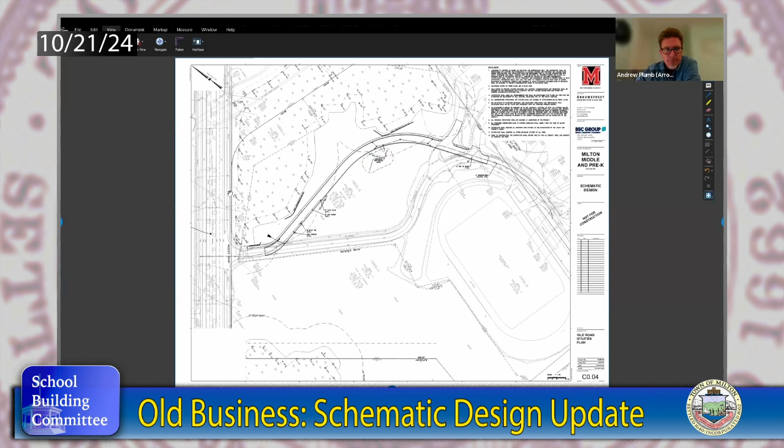Utilities plan. Let's keep going.

Okay, so here's a site plan, which we'll see again in the landscape plans and in the architectural. One thing I'll point out, which we talked about in the last meeting, is that we're basically using the east edge of the building, using that foundation as the retaining wall, whereas in earlier iterations there was the building and then a space and then another retaining wall. We found that this is a much more straightforward and efficient way to handle the grading that needs to happen adjacent to the field.

Let's go to the next one. I'm trying to get to the landscape plan, which should be any second now. Yes, this one here. Could you zoom in a little bit, Seamus, just so we can see it better. That's great.

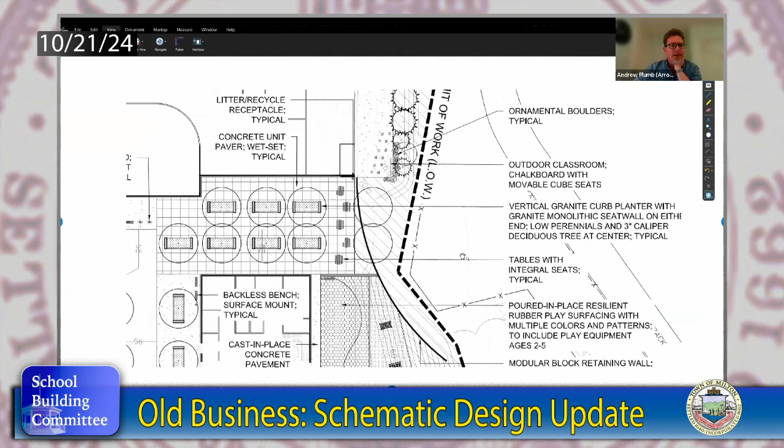Previously, we had a receiving sort of trash and receiving zone located here in the building, which we all agreed was problematic because it would mean that there was this desirable plaza for spill out space, and then the occasional need for trucks to come in and make deliveries or pick up trash. So what we've done is taken this piece of program and moved it to the end of the building.

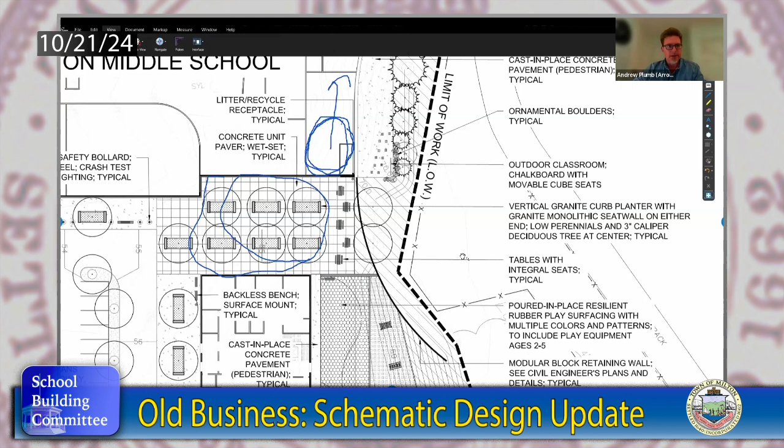That's off of Gile Road, and we're looking at putting receiving and a loading area up there. If you zoom out, I'll point out where that is, and then when we get into the architectural drawings I can call it out more clearly. Previously I was circling that spot, and what we've done is move that to this spot. So the idea is that loading and receiving can happen coming off of Gile Road into this area, which clears out the space between pre-K and the middle school, allowing it to be student focused instead of dealing with deliveries.

Shonali, did I miss anything on this landscape plan? Anything else you want to add? Just one thing I wanted to touch on with landscape is that between our civil engineer, our landscape architect, and ourselves, Gile Road is not flat. So they worked really hard to grade the new Gile Road so that as you come in, you can enter at the 55 first floor grade level, making all of that really accessible.

The north side of Gile Road is a little bit higher than that 55, which helps us with that pathway occurring on the second floor and ending up closer to the high school. So we're taking advantage of all of these slopes, but still able to maintain accessible routes without steep slopes, so that those who have mobility issues or concerns about traversing the site are still able to do so easily.

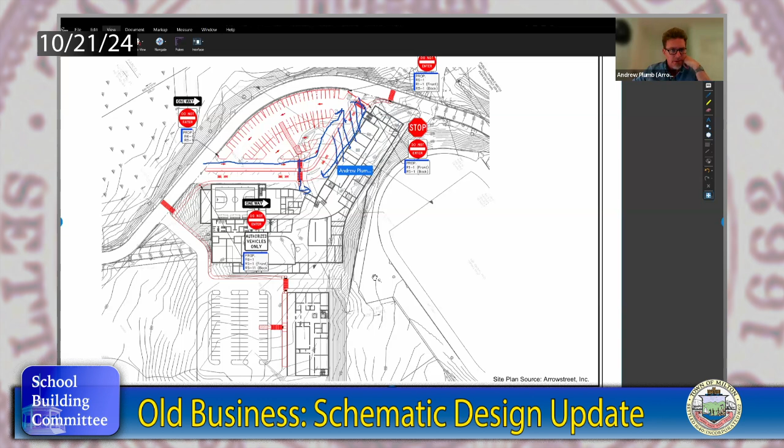The point Shonali was just making about the efforts we went through to make as flat a grade as possible is that this zone I'm going to hatch here is all very, very flat. That has to do with the coordination we were able to do across the consultants to make that work out, creating a nice safe and flat zone to arrive to.

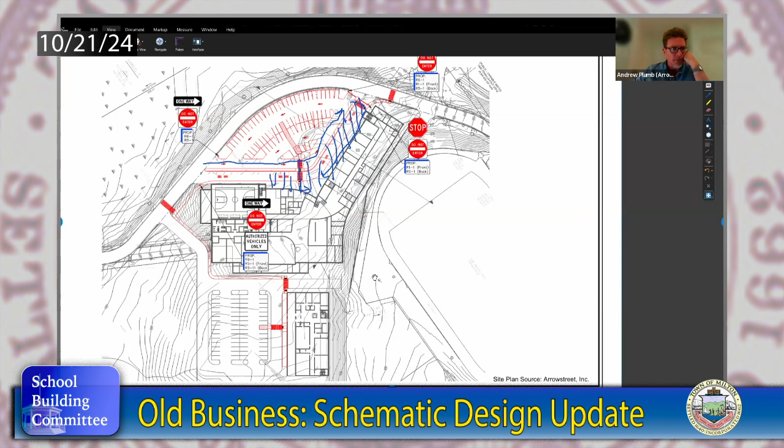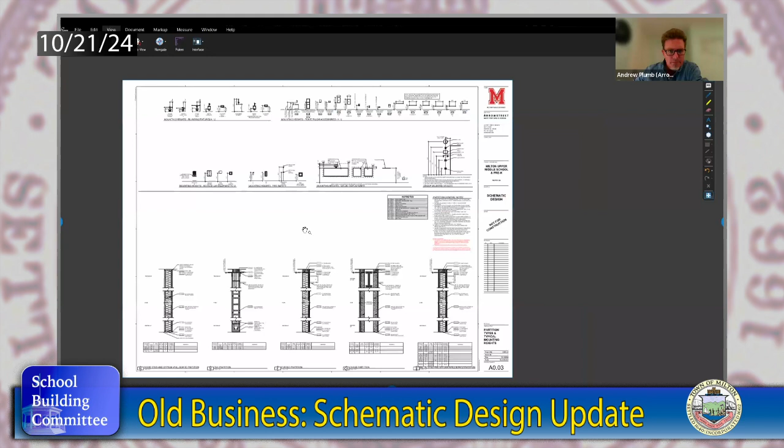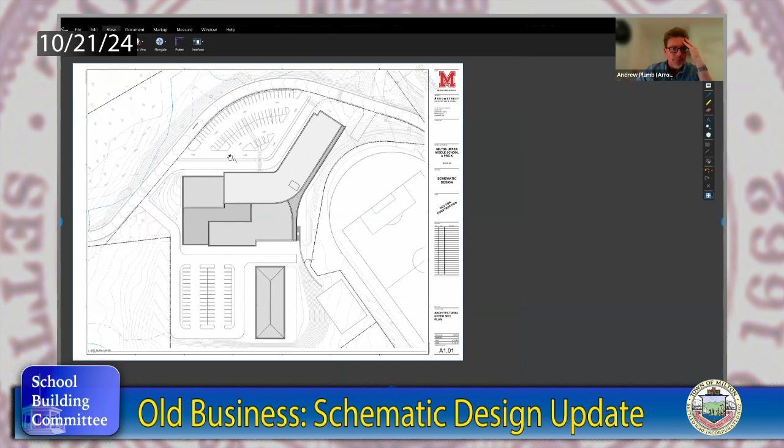And then if you go to the next sheet, you'll see here we're looking at it from a bird's eye view, top down, seeing the roofscape of the middle school and the pre-K, and you can see the elevated area here that we talked about in the path that was on the landscape plan. Okay, we can go to the next.

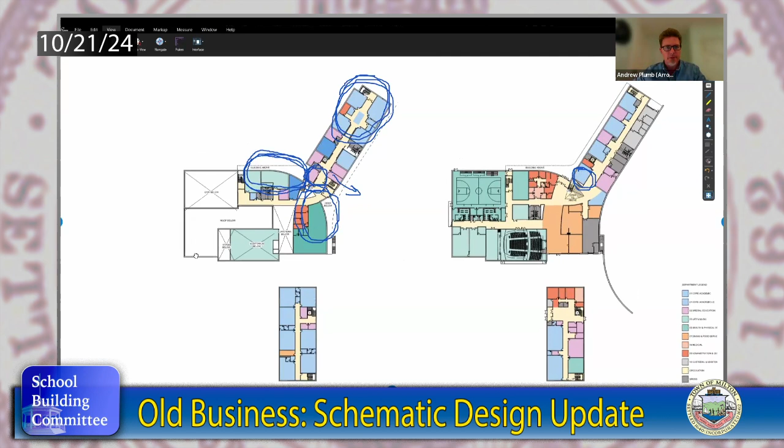And then let's pan up to one of the other two floors, which have very similar layouts, but just a reminder again that we've got the three teams, one on each end and one in the middle, with the special education programs interspersed.

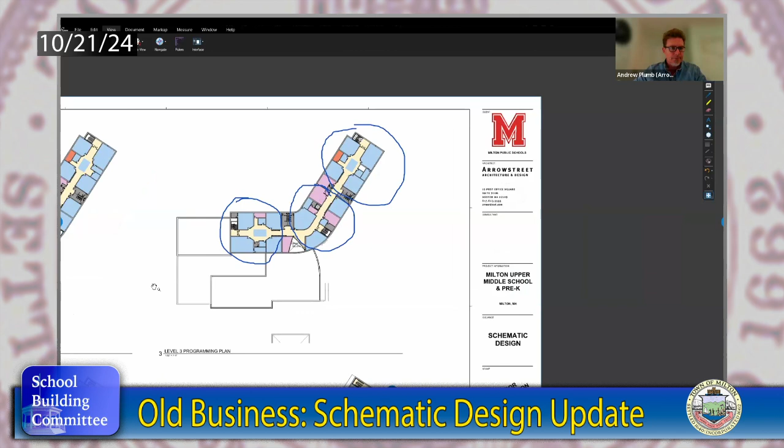Okay, so let's go to the next.

Great. So these drawings are getting a bit more technical in nature, and if we zoom in, just to orient you to the types of things we've drawn through now - we were looking at those colored diagram plans for a long time while we were making big moves. Now we've gone through and started to account for actual wall thicknesses, doors, door swings. We've done reviews of the fixture counts for the bathrooms based on the code review we did with our code consultant, making sure that we're providing the right number of toilets and lavatories and sinks, et cetera, on each floor for the various programs. We're just sharpening the pencil, so to speak, on how all of these things start to come together.

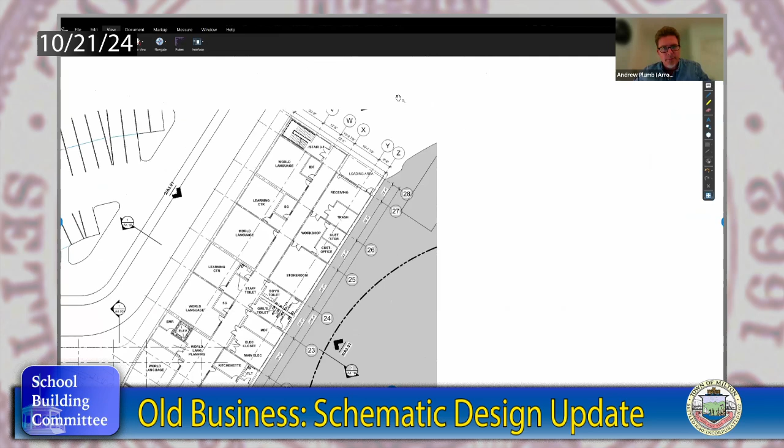Let's pan to the top of the plan quickly and zoom in on that - I can point out the loading and receiving area that we were talking about before. So here, this is a loading area that we're imagining could be recessed so that it's somewhat protected from weather. We're not currently thinking of this as a loading dock - it's not that there's an elevated plane that's 3 feet up from the bed of a truck, but it is an area where deliveries can be dropped off on a pallet and brought into the building and then distributed. And so these areas here are all back of house, supporting spaces for the building.

And let's see, can we pan back towards the main space? So I will - tell me if I'm getting too in the weeds for everyone or not - but I will walk you through a little bit.

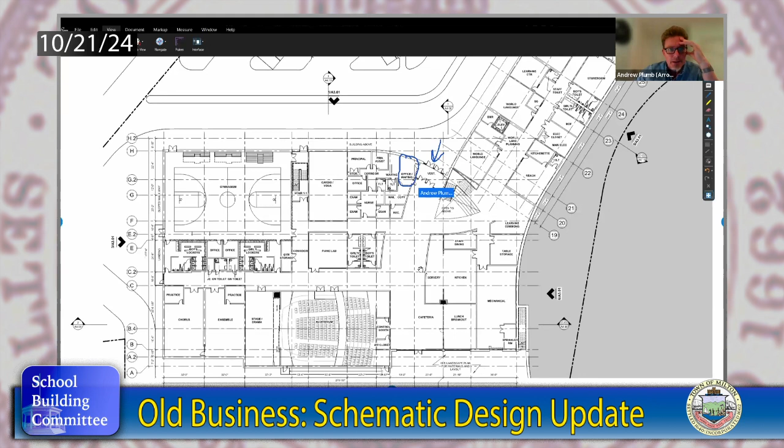So here's our entry and our main office, which allows you to check in and either pass through the office and back out once you've been checked in, depending on how they're running that. And then we've got the main circulation space in the knuckle. This here is our cafeteria space with a lunch breakout space, which is for quiet eating and could potentially be used as a conference area at different times. The servery for the kitchen is here.

Moving along down the hall, we've got the entry to the auditorium located here. One nice thing about the auditorium is that you enter at the level of the first floor, and you can then move up to some tiered seating or down to some tiered seating. In either case, you can move along the edges at that same level to get to the stage, which makes this a very accessible setup for the auditorium, the stage, and the drama room.

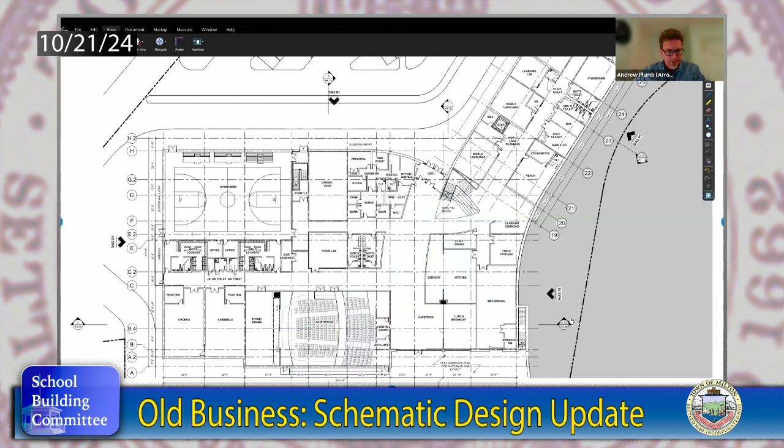I think I'll pause there on this level. Happy to go into more detail if anyone would like, but why don't we go up to the next page?

One of the things we've also done a lot of work on is the grid lines you'll notice in the drawings now. We've looked at getting those lined up with each other from floor to floor, which simplifies the structural system of the building. We've reviewed that with our structural engineer to talk about what he needs for it to be efficient. I'm sure there's more coordination to be done in the next phase, but we're in a good place for this stage of schematic design.

Andrew, would you like to point out some of the areas where we've highlighted moments of glazing? Sure. We didn't talk about it on the piano lab, but the idea is that the piano lab would have some glazing because it's an interior room, so it's going to get some light and transparency, and also a visual connection to the other music rooms.

I know Andrew wants to talk about some of the glazing here that we've identified for pricing so we can hold some numbers. So this area here, where you arrive at the top of the stair and which provides connection out, is something we're imagining as more glassy, compared to the standard exterior wall where the classrooms are, which we're imagining as a masonry wall with punch openings. In a moment like this, where we're trying to create a very specific connection to the landscape, that would be more glass.

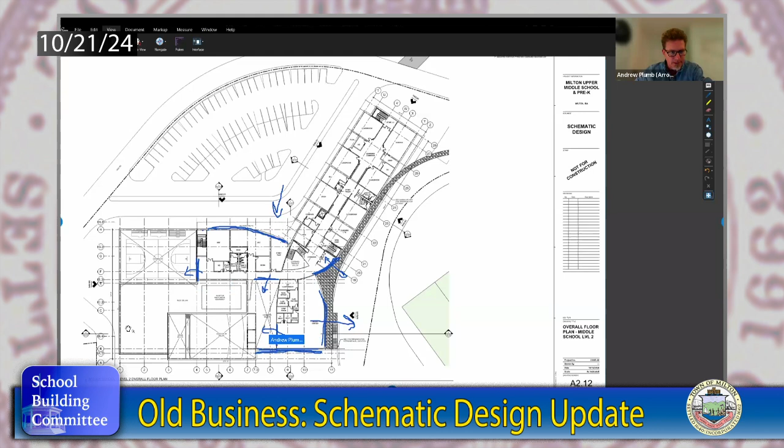If you look at that stair on the left side, there's glazing here so that students who want to watch what's happening in the gymnasium can look down, overlooking the gymnasium. So there's an overlook here, which is a nice little moment at the end of this corridor into the gym. And there's a moment here overlooking into the cafeteria, and here as well from media over to the cafeteria.

Why don't we go up to the next level?

Another moment of interior glazing we're thinking about is located here. This is an open-to-below space that for fire code reasons can't be connected—the air itself can't be connected between them—but it can have a simple glass system that separates the two, so there would be an overlook down into there. This being on the south side of the building, we imagine it would have more glass, allowing light to stream into the knuckle of the floor and also down to the lower levels, making a dynamic kind of hub of the building.

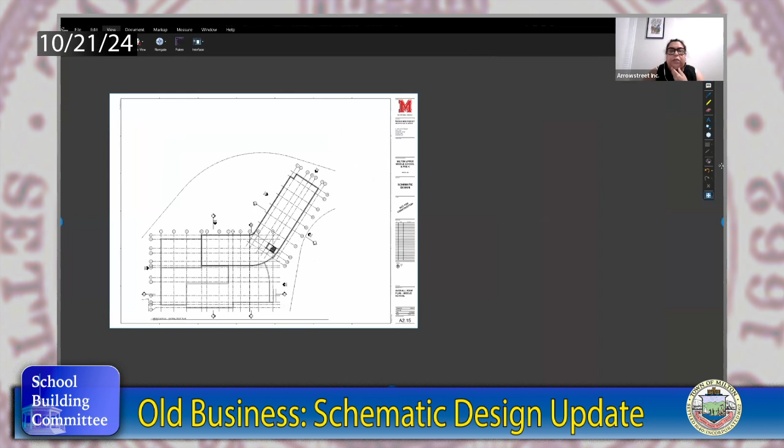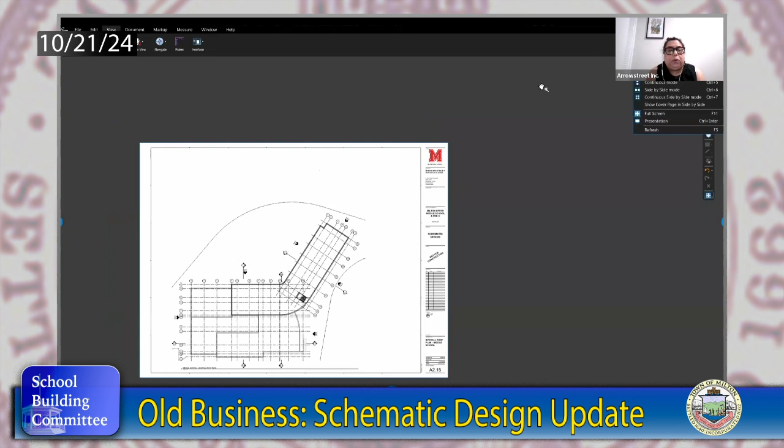We don't have to go page by page with the narrative that Seamus sent, but it outlines the overall description of the architectural assumptions of things that we wanted included, to be priced, as well as some updated coordination on the metrics of what the exterior wall will be from an energy code perspective. You'll see that and note that as well.

And then structural and MEPFP obviously have updated, because from the feasibility to now, we've relocated some of those back of house rooms that they rely on for their coordination. So they've updated their narrative effectively to reflect all of those changes.

I think that's really the big summation. A lot of the work was that site work, that coordination with the consultants, getting a lot more specific about the footprint of the building and its location, and really working with what Guile Road sloping needs to be, making that parking work, and then transitioning across the site architecturally to make sure all these spaces fit.

Thank you. Any questions for anybody for what we're seeing there, just on the updated drawings or anything like that? Nothing.

I just want to say, I think the redesign of the first floor to move the storage to the other end is great, fantastic, addresses a lot of those issues that were originally caused in terms of ensuring we have a nice, safe student outdoor gathering area. So thank you for looking into that.